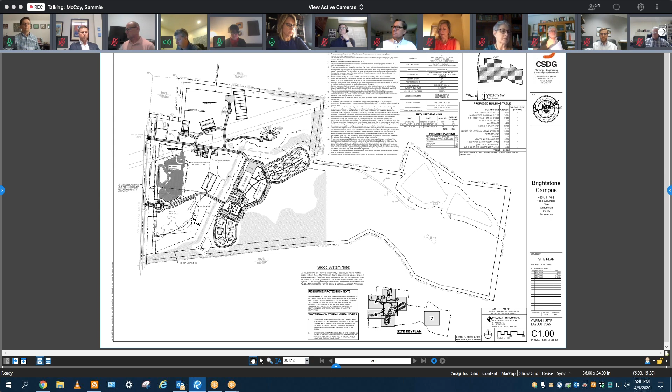Moving on to item number 16. We have a non-residential site plan review for the Brightstone Campus on 139.2 acres located off Columbia Pike in the 11th voting district. Staff, Ms. Aaron Holmes. Thank you, Mr. Chairman. The applicant is requesting approval of the overall master plan for the Brightstone campus, which consists of approximately 211,000 square feet of buildings and the associated parking.

Buildings will be utilized for job training, functional academics, and learning of life skills for the intellectually and developmentally challenged adults. At full build-out, there will be housing for 76 students and staff and caregivers. The applicant's letter of intent is attached here to as attachment 16-4.

Properties in question are located on Columbia Pike, approximately a quarter mile south of Coleman Road. Surrounding properties range in size from approximately 3 acres to 221 acres and are used primarily for residential or agricultural purposes. To the east of the property in question is the required open space and drip areas for the non-traditional wastewater system for the Bell Vista subdivision.

There will be 2 points of access from Columbia Pike, and TDOT has granted conceptual approval for both access points. The use is anticipated to generate less than 10 peak hour trips per acre, and as such, neither a traffic study nor the traffic shed analysis is required.

As the properties are located within the City of Franklin's urban growth boundary, a copy of the plans have been shared with the city staff, and at the time of this writing, no comments have been received. Water to the site is served by HB&TS Utility District, and staff has received confirmation that service is available.

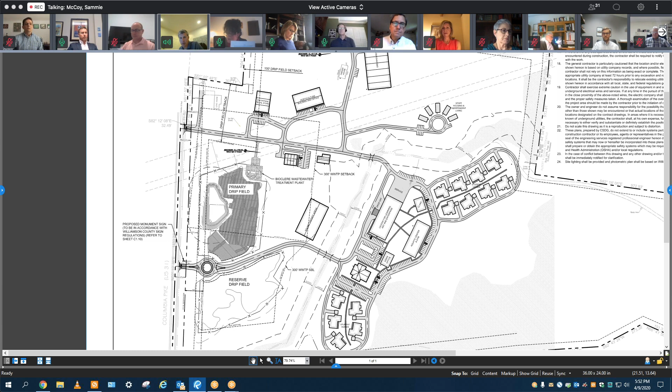Thank you, Aaron. Do we have any discussion about item 16? Lothers, I move that we accept staff recommendation. Steve Lane, second the motion. Perfect, we have a proper motion and second. Do we have any further discussion? Hearing none, let's go to a vote.

Robin Baldry, Aye. Steve Lane, Aye. Beth Lothers, Aye. Keith McCord, Aye. Brian Richter, Aye. Rhonda Rhodes, Aye. And Chairman McCoy, Aye. So motion passes.

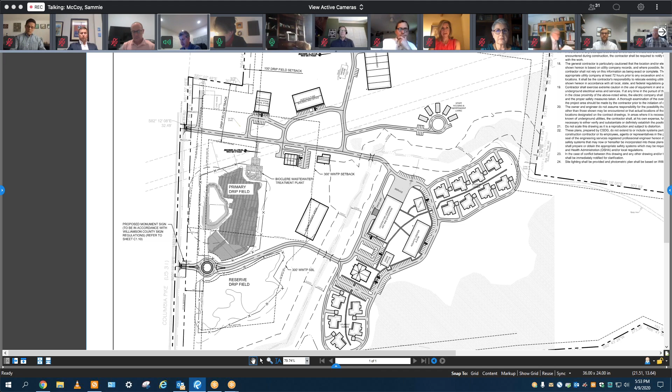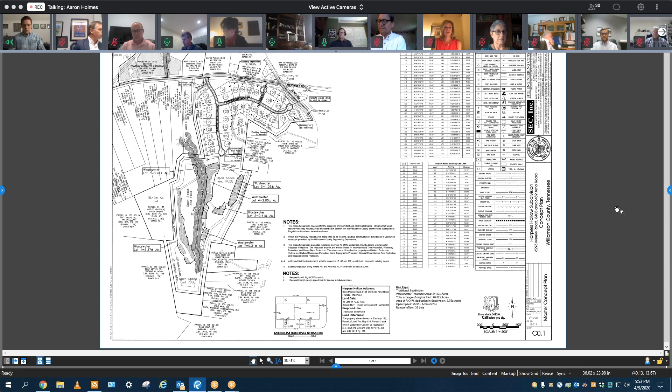Moving on to item number 17. Concept plan review for Harpers Hollow subdivision containing 33 lots on 70.82 acres located off Arno Road in the 5th voting district. Staff, this is Aaron Holmes. Thank you, Mr. Chairman. The applicant is requesting approval of a 33-lot traditional subdivision on the portion of the property zoned hamlet. The review of a concept plan is the first stage in the development approval process. Subject property totals approximately 70.82 acres and is located at the intersection of Arno and Meeks Road.

The site contains a number of natural resources, including moderate and very steep slopes, streams, and a large area of woodlands.

Approximately 80% of the site is covered in tree canopy. The required 50-foot open space strip around the perimeter of the property has been provided. The proposed development consists of 33 lots, ranging in size from 20,000 square feet to approximately 36,000 square feet. The overall density is 0.47 dwelling units per acre. 56% of the site will be preserved in open space, and 54% of the existing tree canopy will be retained.

The traffic shed analysis performed by the applicant indicates that the proposed number of lots is within acceptable limits based upon the capacity of existing roadways. Access to the proposed development will be provided from a single entrance on Meeks Road, which is classified as a local roadway by the major thoroughfare plan.

Per Section 5, Subsection 5.3K3B of the Williamson County Subdivision Regulations, a dedication of 25 feet off the center line of Meeks Road and a dedication of 30 feet off the center line of Arno Road will be necessary. Within the development, the applicant is requesting a right-of-way width of 40 feet in order to locate sidewalks outside of the right-of-way, and a design speed of 25 miles per hour for internal roadways.

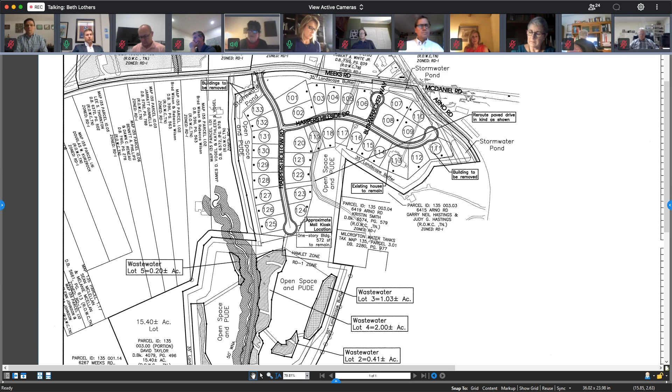I have a couple questions, Mr. Chairman. Go ahead, Beth. Thank you. This is Beth Lothers. Floyd, can you remind us how many units there have to be within a subdivision for us to require turn lanes off the roadway? What does our zoning ordinance state?

This is Floyd Heflin, I might ask Mike to address that. It's subject to the traffic shed, so they're under the allowable number of units for the traffic shed, and it's also under, I believe, the total number of lots required for an access analysis. Is that correct, Mike? This is Mike Matteson, yeah, that is correct. Until you get to 50 lots, there's no requirement in the zoning ordinance to do an intersection analysis that would include the left and right turn lane warrant analysis.

It sounds to me that maybe we'd want to look at this, but we have to follow what is in place now, and that's what our duties are to do. It's interesting when you have these kind of smaller but large-lot subdivisions cumulatively along a roadway, that may be something we want to look at in the future. I understand that right now it has to be at least 50 units. Thank you.

Mike, this is Robin Baldry. Do you remember how many houses are in that subdivision we approved down Meeks Road back last year, I guess? Yeah, at Starnes Creek, I want to say there were about 80. Is that right, Aaron? I believe that's correct, yes. So there's 80 lots, and this one is 33 lots.

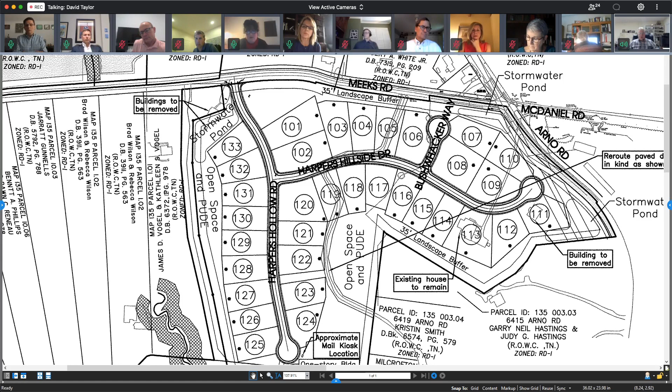And what about the property being saved, the structure being saved? That is the existing single-family home on Arno Road on the corner. Okay, and that'll be part of this development. Okay, thank you very much. Yes, you're welcome very much.

Any further discussion? Do we have a motion or anything at this point on this item? This is Rhonda Rose. I move that we accept the concept plan as recommended by the planning staff. Thank you, Ron. Brian Richter, second. Having a proper motion and second, do we have any further discussion? Hearing none, take a roll call vote, please, Mike.

Okay, thank you. Robin Baldry, No. Steve Lane, Aye. Beth Lothers, Aye. Keith McCord, Aye. Sammy McCoy, Aye. Brian Richter, Aye. And Rhonda Rose, Aye.

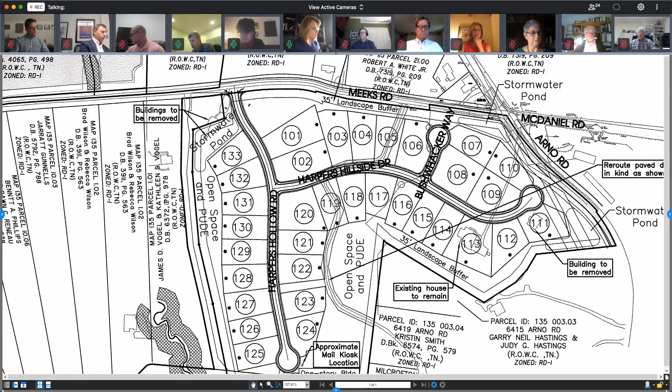Moving on to item number 18. Liberty I-840, lots 1 and 2, large lot subdivision on 12.99 acres located off of Liberty Road in the first voting district. Staff? Thank you, Mr. Chairman.

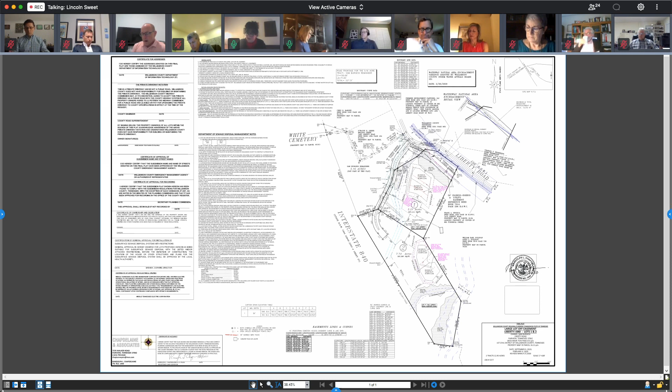The subject property is approximately 13 acres in size and is located off Liberty Road, approximately a quarter mile south of Fairview Boulevard. The applicant is requesting approval of a large lot easement subdivision in order to create the second and third lots off an existing 50-foot ingress-egress utilities easement. The site contains natural resources requiring protection, consisting of steep slopes. There are moderately steep and very steep slopes on the lots, which are located outside of the building envelopes. All zoning ordinance requirements, including those regarding the protection of natural resources, have been met.

The applicant is proposing individual septic systems for the lots, and the Williamson County Department of Sewage Disposal Management has approved the request. Water will be provided by individual wells on the lots, as no fire hydrants are proposed, and none are currently located within 500 feet of the building envelopes. The building envelopes have been separated by 200 feet. The plat is in order and staff recommends approval.

Thank you, Lincoln. Any further discussion on this item?

Hearing none, do I have a motion? Brian Richter moves that we accept staff's recommendation. Beth Lothers seconds. We have a proper motion made and seconded. Do we have any further discussion?

Hearing none, let's go to a roll call vote. Robin Baldry, aye. Steve Lane, aye. Beth Lothers, aye. Keith McCord, aye. Brian Richter, aye. Rhonda Rose, aye. Chairman McCoy, aye. Motion item 18 passes.

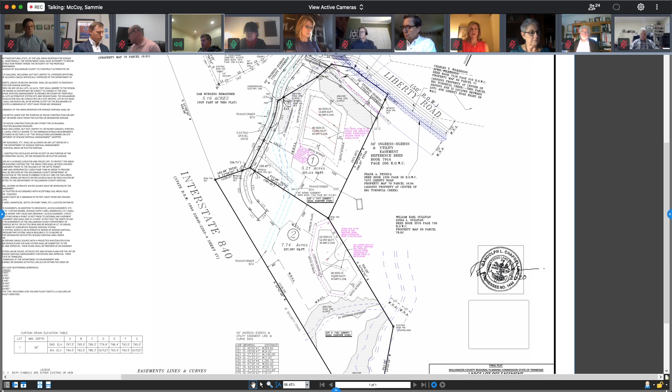Moving to public hearing item number 19, that was withdrawn. Moving on to concept plan number 20, that was also withdrawn. Moving on to item for preliminary plat, item number 21.

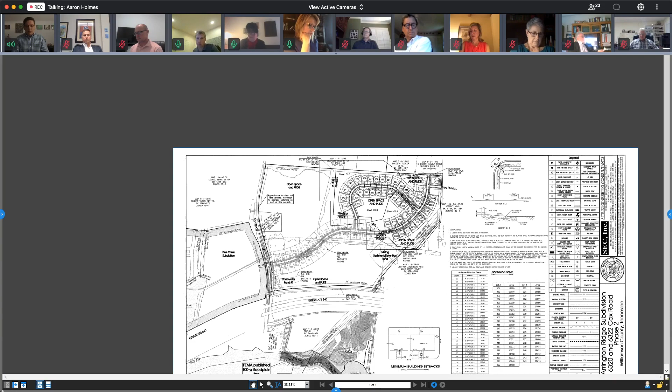Preliminary plat review for Arrington Ridge Phase 2, containing 43 lots on 42.95 acres, located off of Cox Road in the 5th voting district. A concept plan for this development was approved by this body at the May 2017 meeting, and the applicant is now requesting preliminary plat approval for Phase 2 of the development, which contains 43 lots and approximately 14 acres of open space. The plat is consistent in layout with that of the approved concept plan.

Staff recommends approval of the preliminary plat. In conjunction with final plat consideration, the following items must be addressed. Number one, prior to consideration of final plat approval, the applicant shall submit HOA documents for review and approval by the county attorney's office. The HOA documents must be submitted with the final plat, and the approved HOA documents recorded concurrently with the recording of the final plat.

Number two, establishment of a performance bond for roads, drainage, and erosion control. Number three, establishment of a performance bond for water improvements in favor of Milcrofton Utility District. Number four, establishment of a performance bond for the wastewater collection system. Number five, submission of landscaping plans and establishment of a performance bond for landscaping. Number six, execution of a stormwater maintenance agreement and submission of an operation and maintenance plan for stormwater improvements. And number seven, submission of the approved final plat in DWG format on recordable media based on the Tennessee State Plane Coordinate System prior to signature and recording of the plat.

Thank you, Aaron. For item number 21, do we have any further discussion? Do we have a motion? Beth Lothers moves we accept staff recommendations. Brian Richter seconds. We have a proper motion and second. Do we have any further discussion?

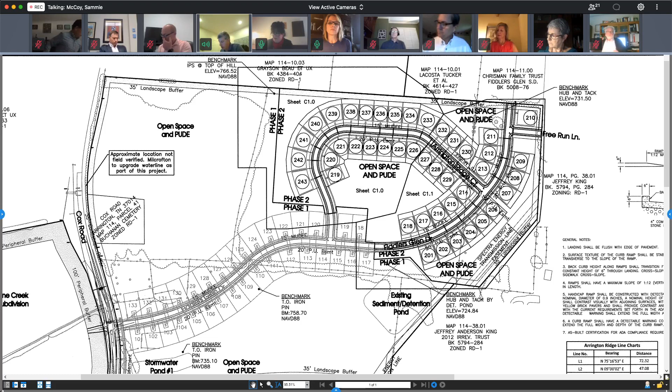Moving on to final plats, item number 23. We have a final plat review for Sanctuary Subdivision, a large lot subdivision with large lot easement containing 5 lots on 91.63 acres located off of Green Chapel Road in the 1st voting district.

The subject property is approximately 92 acres in size and is located off Green Chapel Road, approximately 1 mile north of North Lick Creek Road. The applicant is requesting approval of a large lot easement subdivision in order to create 5 lots off a new 50-foot ingress-egress utilities easement. The site contains natural resources requiring protection, including steep slopes and woodlands. There are moderately steep slopes inside and outside of building envelopes, and very steep slopes outside of building envelopes. The site is also almost entirely under tree canopy.

All zoning ordinance requirements, including those regarding the protection of natural resources, have been met. The applicant is proposing individual septic systems for the lots, and the Williamson County Department of Sewage Disposal Management has approved the request. Water will be provided by individual wells on the lots. As no fire hydrants are proposed, and as none are currently located within 500 feet, the building envelopes have been separated by 200 feet.

The plat is in order, and staff recommends approval subject to the following. The notice of coverage issued by TDEC will be required prior to the signing of the plat. Number 2, a land disturbance permit must be obtained for the overall development. And number 3, driveway and drainage infrastructure must be complete, consistent with zoning ordinance requirements, prior to issuance of building permits.

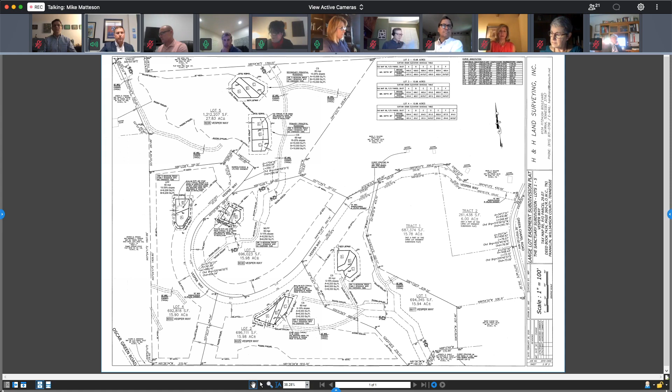Motion passes. Moving on to item number 24, we have final plat review revised for Troubadour Golf and Field Club, Section 1 containing 7 lots on 553.07 acres located off of Cox Road in the 5th voting district.

Staff? This is Aaron Holmes. Thank you, Mr. Chairman. A revised concept plan for this development was approved at the January 2020 meeting, and the applicant is now requesting approval of a revised final plat for Section 1 in order to revise the boundaries of the open space to coincide with the boundaries of future sections that will border this section.

This section of the development includes the golf course and amenity area and other open space lots, as well as the wastewater system components. It should be noted that a final plat for this section has already been recorded, and this revision will require the signatures of all lot owners within the section to be affixed to the plat prior to signature and recording of the revised final plat. The plat is in order, and bonds for the non-traditional wastewater system, which are included within this section, have already been posted and are still active.

Staff recommends approval with the following conditions. Number 1, signature of all lot owners within this section shall be required prior to signature and recording of the final plat. Number 2, prior to the issuance of a land disturbance permit for the irrigation pond, the applicant shall provide a no impact statement certifying no increase in runoff off-site flood elevations. Number 3, execution of a stormwater maintenance agreement and submission of an operation and maintenance plan for stormwater improvements. And number 4, submission of the approved final plat in DWG format on recordable media based on the Tennessee State Plane Coordinate System prior to signature and recording of the plat.

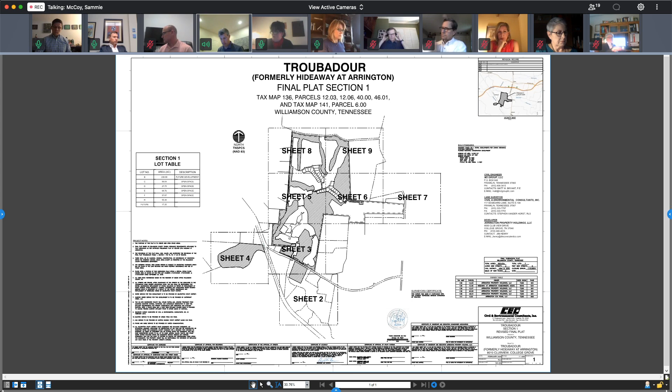Let's take a roll call vote. Robin Baldry, aye. Steve Lane, aye. Beth Lothers, aye. Keith McCord, aye. Brian Richter, aye. Rhonda Rose, aye. Chairman McCoy, aye. The motion passes.

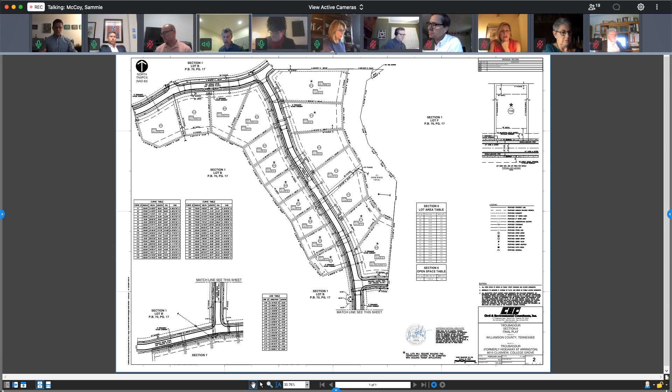Moving on, item number 25 was on the consent agenda. Item 26 was on the consent agenda. Item number 27 has been withdrawn. That moves us to the item we added, item number 28, the final plat for Arrington Ridge, Section 1. I don't have all the other information, so staff, if you could start that.

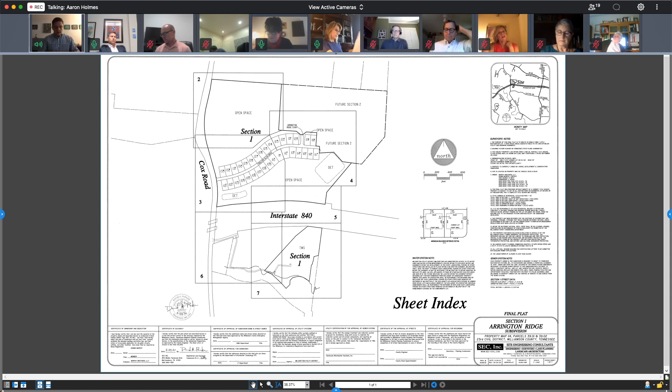Thank you, Mr. Chairman. This is the final plat review for Arrington Ridge Subdivision Section 1, a reapproval containing 33 lots on 93.12 acres, located off Cox Road in the 5th voting district. A revised preliminary plat for this section was approved at the February 2020 meeting, and a final plat for this first section, containing 33 lots, approximately 51 acres of open space, and the wastewater treatment and disposal system, was approved at the March 2020 meeting.

The applicant is now requesting reapproval of the final plat in order to reduce the amount of the required performance bond for roads, drainage, and erosion control. Staff recommends reapproval of the final plat with the following conditions.

Number one, prior to final plat submittal, a zoning certificate must be obtained for the completed wastewater treatment and disposal system. Prior to issuance of the zoning certificate, the applicant shall provide: a letter from TDEC indicating that said treatment and disposal system was installed and is functioning; as-built drawings showing the location of all treatment system components and a sealed certification letter from the design engineer indicating that said treatment system was constructed in accordance with the approved construction plans and specifications; and a letter from the owner/utility provider indicating that it has accepted said treatment system and is currently operating same.

Posting of a performance bond in the amount of $120,000 for said treatment and disposal system as specified by the county's wastewater consultant, and posting of a performance bond in the amount of $50,600 for landscaping improvements. Number two, the approved HOA documents must be recorded concurrently with the recording of the final plat. Number three, establishment of a performance bond for roads, drainage, and erosion control in the amount of $383,000. This is a reduced amount based on work completed.

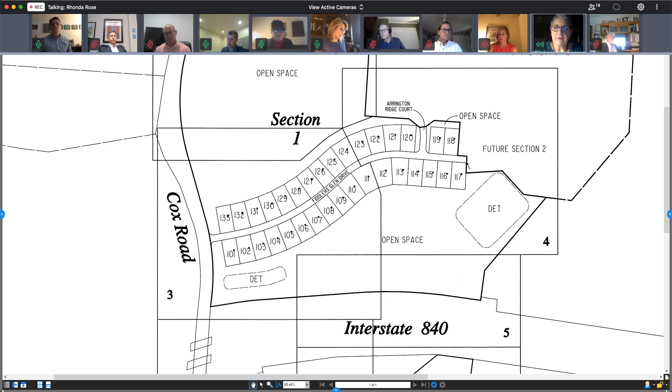Thank you again, Aaron. Any further discussion on item number 28? I just have a question, not related to approval. I'm curious, I see on the map that we're looking at Section 1, and there is a future Section 2. Do we know if there are other sections to be added after Section 2? Commissioner Rose, I believe Section 3 will be the last one.

Richard House, the design engineer, is on the line and can verify that for us. This is Richard House with SEC. No, Sections 2 and 3 are all that will be allowed in this project. I'm not seeing where Section 3 is on my view of the map. Section 3 would be south of 840. It's a little stub street with 13 lots on it that were approved on the concept plan. Thank you.

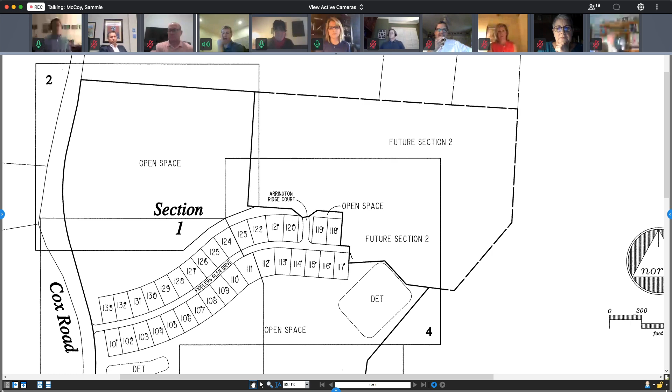Any further discussion? Do we have a motion on this item? I move that we approve staff recommendations. Commissioner Lathers. Steve Lane, second. I have a proper motion made and seconded. Is there any further discussion?

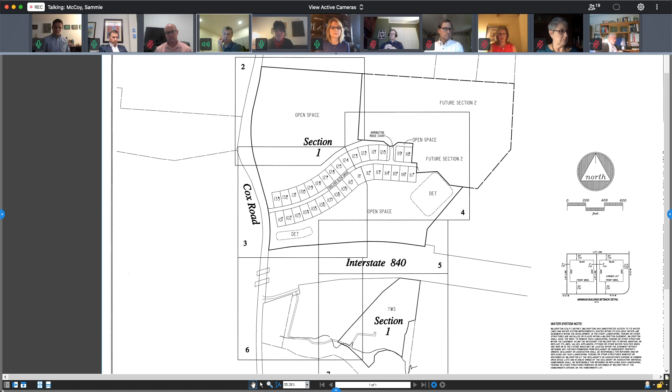Hearing none, Mike, will you take a roll call vote please? Commissioner Baldry, aye. Commissioner Lane, aye. Commissioner Lathers, aye. Commissioner McCord, aye. Commissioner Richter, aye. Commissioner Rose, aye. Chairman McCoy, aye. Motion passes. That concludes our agenda for the evening.